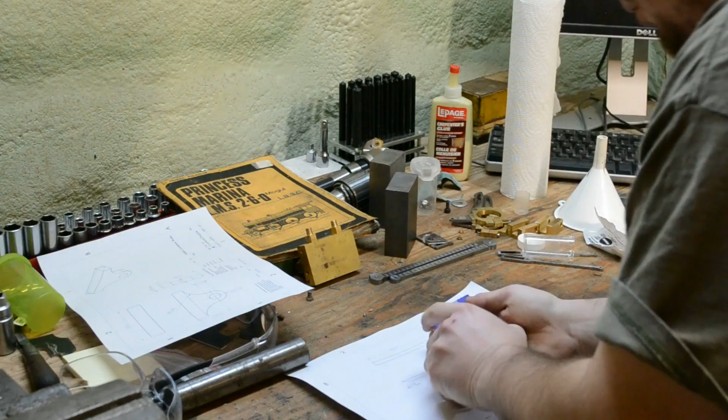So I made some decisions about my channel. I'm not going to do straight little videos like we did the last series, where I go about time, I drilled a hole, I did the reamer, I did this and I did that. No, it's just going to take too long.

Instead I'm going to go with the format of progress updates. Every once in a while I'll make a video, talk about what I did, what I didn't do. If I have some sort of parts I need to make, I'll make special parts. Like we got this one made coming up - an interesting little part to make, not very big.

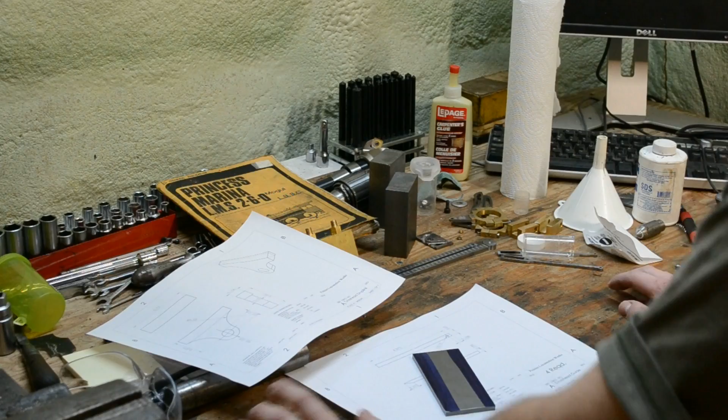I don't like that long format of 20-minute videos of, well, I came in here with the edge finder and I touched it - it just takes a long time to make. If I just make the thing and show you off camera what I made, and go through the progress of building the locomotive, I think we'll end up with a series of videos that'll be great.

Also, I was thinking about the title. As you saw from the last video, the title was 'LMS Building an LMS 2-6-0, blah, blah, blah.' If you don't know what an LMS 2-6-0 is, it's not going to be great. I'd like to cater my video to anybody watching who has an enjoyment of machining videos. So we're going to dumb the title down from 'Building an LMS 2-6-0' to 'Building a Steam Locomotive.' Actually, we're going to go one level lower.

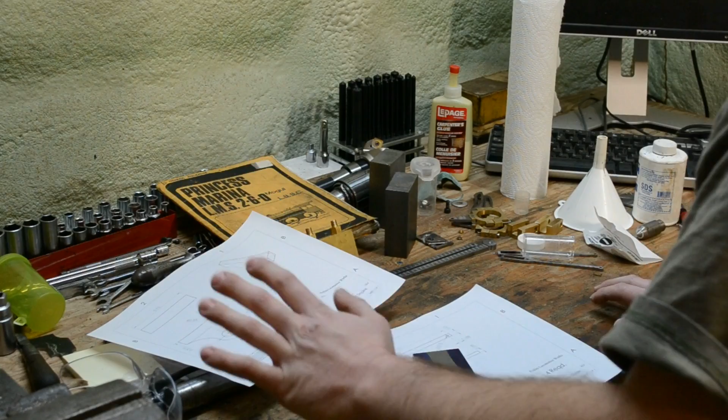Alright, we're going to go Choo Choo Goes Woo Woo. That's what we're going to call it. So this series of videos going from the completion of an LMS 2-6-0 will be called Choo Choo Goes Woo Woo.

So here we go, the first episode of Choo Choo Goes Woo Woo, and we're making the crosshead guides, or the little slidey bars, as I like to call them.

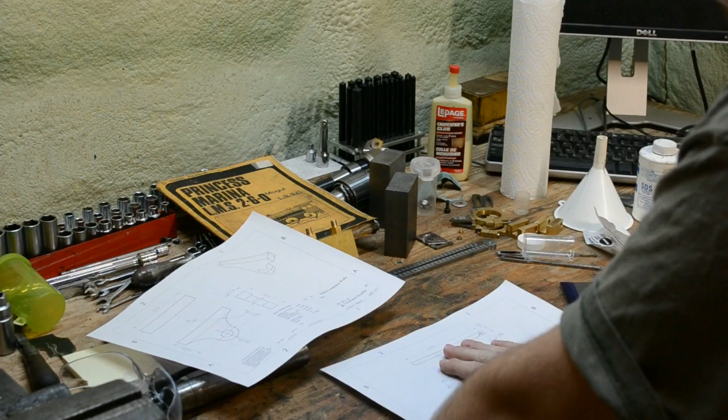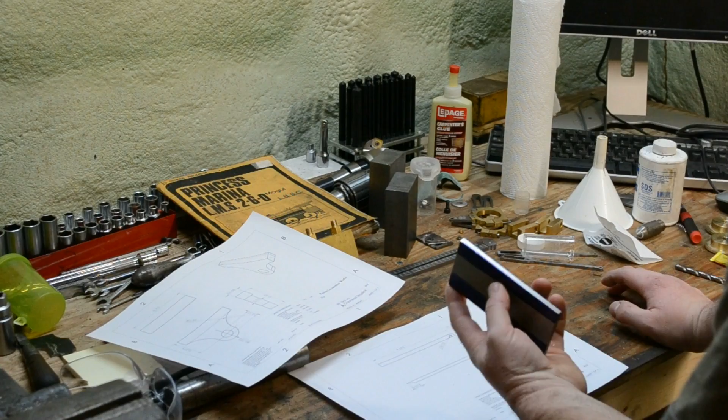We're going to start off with a piece of O1 tool steel, and we have all our dimensions here - what we need to shoot for. We already have this pre-ground O1, so we've already got most of our flatness. All we need to do, since we've got two edges already machined and pre-ground, is cut off one and machine it.

Then we're going to flip it around, cut off the other one, and we'll cut them off a bit over length to have enough space to machine them. But first, we're going to gang this one piece up, and I'm going to cut the angle - angle it in the vise and just run the end mill across. Nothing too super specific, but I think we can do that in one pass.

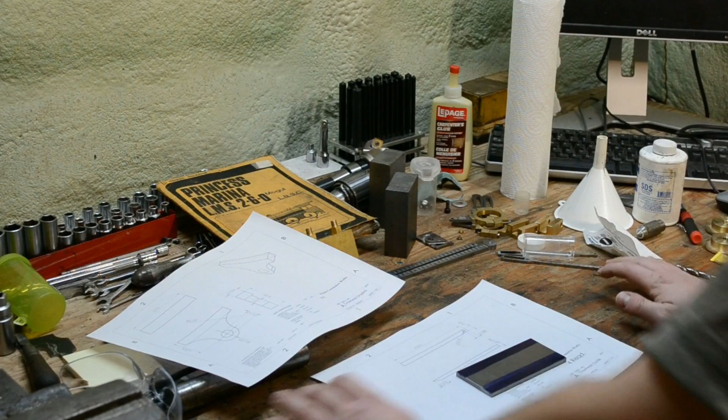So we'll get started, and I'll just do progress updates as I get along. Every time I feel like turning on the camera, we'll turn it on, talk into the camera, and just get about it. And that's where we're at today - we're doing the crosshead guides.

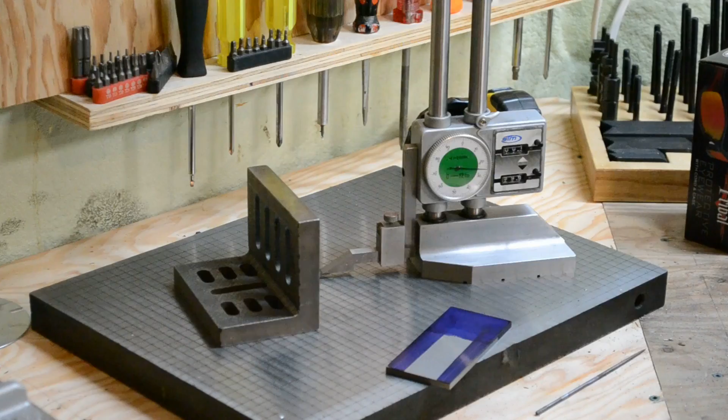So I haven't even introduced you guys properly to the shop. This is the Pickles Locomotive Works - don't ask where that name came from. So this is the meteorology department, or the metrology department, of my shop, where we do all of - there we go again with the friggin' - like I have a full team of machinists 24/7 working round the clock to bring content to you.

So it's the height gauge, and it's a little angle bracket - there I go with the weird names, it's a little angle plate. It's where I do most of my little easy layout jobs and stuff. We're just going to scribe a 3/8 line according to the drawing, and we're going to mill right away to that line on an angle of, well, whatever that angle is. I don't know what that angle is - it's not even an angle. So we're just going to position it in the vise so it looks good and take a cut.

Now, here we go. I'm not going to do it on camera. I'm just going to give you a couple last shots of the meteorology department. It's wonderful. Alright, that's enough.

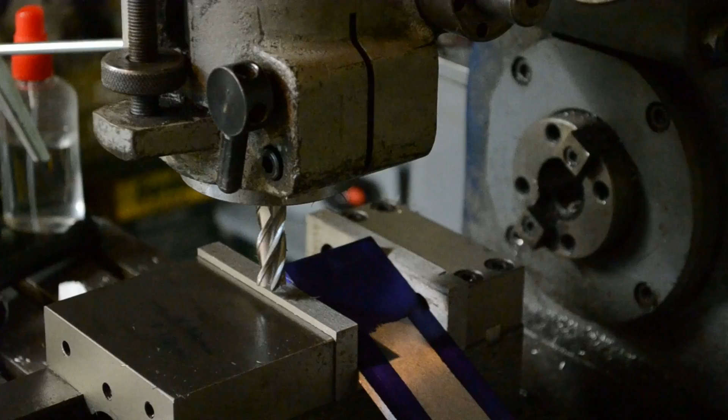So this is the milling machine, you guys have seen it. I just got it angled in by eye because it's not a critical angle, it's an aesthetic angle. I think I got it in there pretty tight. We're going to cut until we hit the line, then start cutting off our pieces. I'll take them to the bandsaw, cut, bandsaw, mill, bandsaw, and that's how we'll proceed the rest of the videos.

Oh, I got a friggin' chip in my hand. And that's how we're going to proceed.

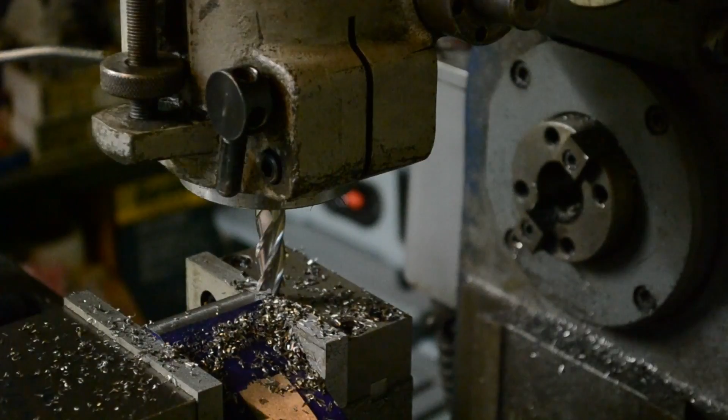I'm not going to bother filming it. I don't want to risk getting a chip in my camera, but there's going to be chips happening, coolant going on, it's going to make lots of noise, it's going to be annoying. It's better if I just snap my fingers like this till it's done. Ready? 3, 2, 1. Now that was quick. Isn't it great? The magic of time, the magic of photo, video, editing.

So we got it cut. You can just pull it off of the vise now and clear out the chips a bit.

So those of you who think, oh well I can't get a machine shop set up - well, I got this milling machine for free, and free-ish. You know, minus the tooling, the cost of renting equipment to bring it down, paying gas for your buddies - so virtually the machine itself was free.

And if I'm moving the table back, I need to pull the piece out of the vise. There we go. Here's to never getting it back in that angle again. So that's one part done, and there it is. Now we got the angle we need, and let's move on to the next step, which is just chopping two of them off.

I'm going to chop one off, machine minimum on one side, flip it over, chop the other one, machine minimum, and we're going to do that till we have 4 guide bars a little slightly bigger than 1/4 inch. Slidey bars for the Choo. Alright, so 4 slidey bars for the Choo. Let's do it.

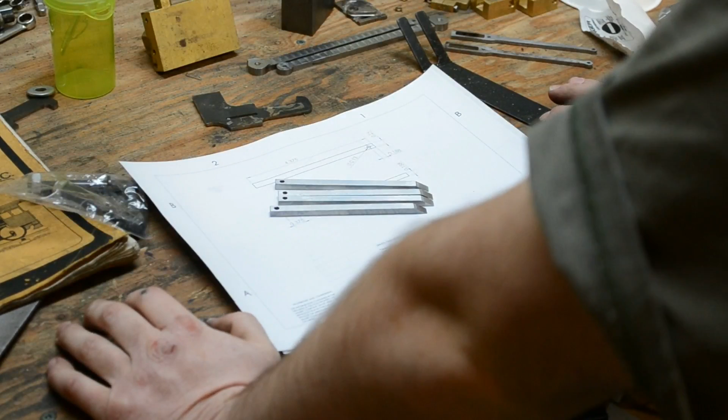So after we've cut all those pieces and made them all to a 1/4 inch thick, that's it - we got all the dimensions done. I went on the drill press and punched a 1/8 hole right where the bolt was going to go through, and these are now as straight as they're ever going to get.

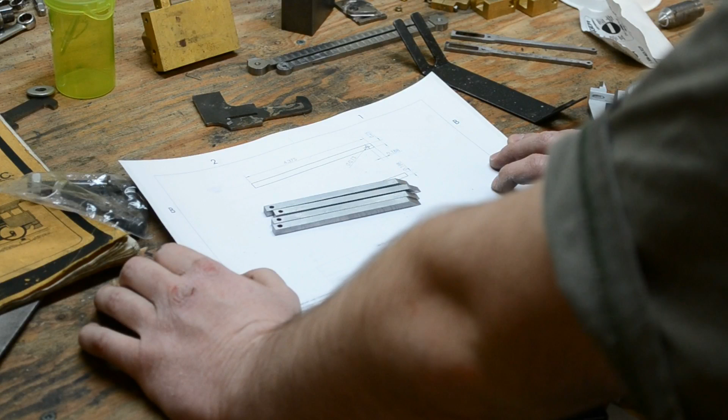Comment nice stuff, or don't comment nice stuff, whatever. I don't really care what you want to comment, so I'll try to read all the comments, because so far I have none. So, yeah.

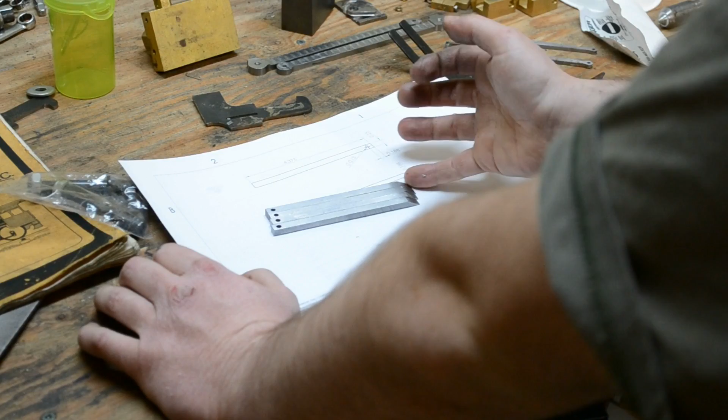This is where we're going to leave the locomotive for about a week or two. Actually, it would say about a week, because I have a wonderful little addition to my milling machine, which you will see. I'm totally prepared for this video, as you can tell.

We're going to be installing a digital readout, and that'll do a nice little video for it, and I'll do my best to try and cover it as best as I can. I've never installed one. It's going to be wonderful.

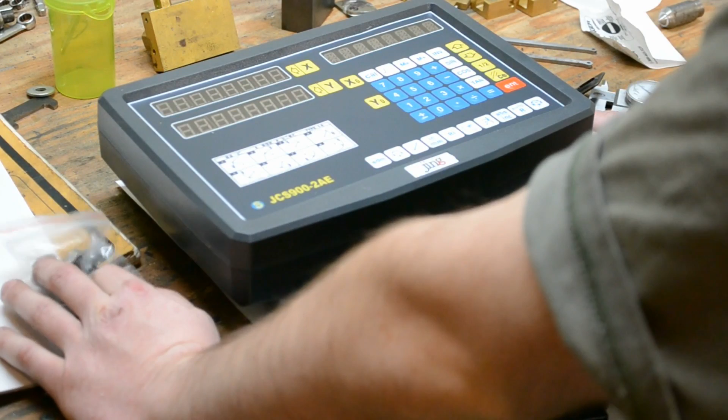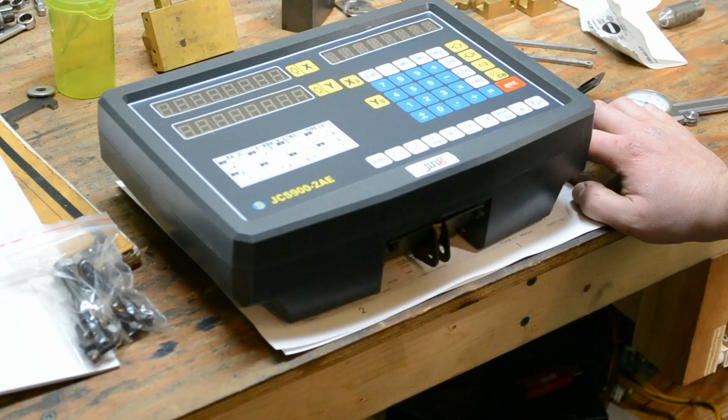So I've just been trying to figure out the threads that this DRO came with, and I can't even figure out what thread it is. I don't have the die, and I don't have the tap, so we're going to switch out whatever these are. We're going to go to something easy, like a 10-32 or a 1/4-20. It's going to be much simpler than trying to figure out what this is, tracking down a tap for it, and having holes in my machine that - all my machine is inch - and I don't want to shove metric holes in an inch machine.

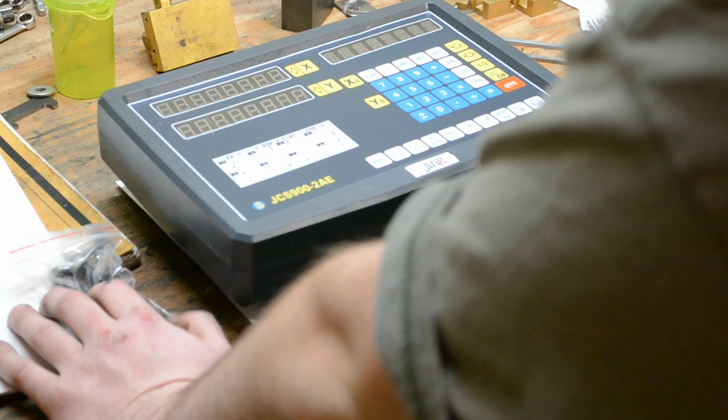So that's it, I got a digital readout. It'll be fun, a great little install, a great little project, and will make my life in production on the milling machine a lot quicker. So I hope you enjoyed it, and we'll see you next time. Take care.